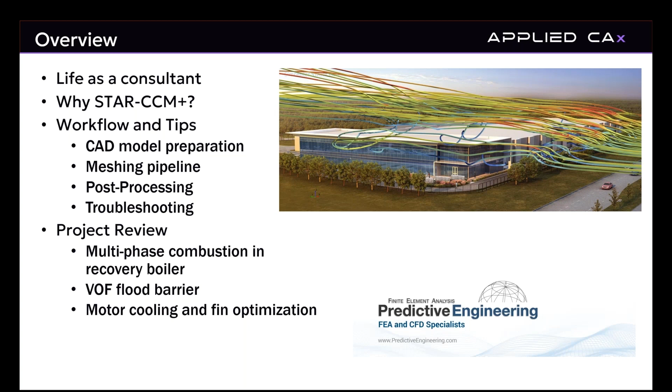We'll go into kind of what life is like as a consultant, why STAR-CCM+ is a great fit for us. And then the bulk of the presentation is going to be focused on my view of workflow and tips and tricks so hopefully you can take up some of these points and improve your overall processes. At the end of the presentation, we will go into a little bit of project review, some of the projects that we've worked on in the past, and how we've used STAR-CCM+ to help solve those issues.

So I want to start off with a comparison of what I call, quote unquote, a real engineer versus a consultant like myself. A real engineer, you are working for an organization. You have a defined mission, you have a goal, you have a product that you're working for, you have an industry that you're focused in. As a consultant, we are somewhat out there in the wild. We are working with clients that come from a wide range of industries. We have done aerospace, but we've also done medical. We've done building services. It may be wastewater treatment, or it may just be a structural, basic mechanical analysis.

One aspect of working for an organization, you probably end up doing the same type of analysis quite a bit, or same groups of analyses, and you will become an expert in doing that type of analysis. For us as consultants, we have to be a little bit more of a generalist. We have to be very good at a wide range of analyses and very competent, and that's because, going back to the first point, we have a wide range of clients coming at us from many different industries.

Another aspect is, working in an organization, you have set tools and set processes that you use, and namely here, it's a CAD tool. So your company's purchased, say, NX for CAD. Most of your models will be coming to you from NX. It's easy to link to those models.

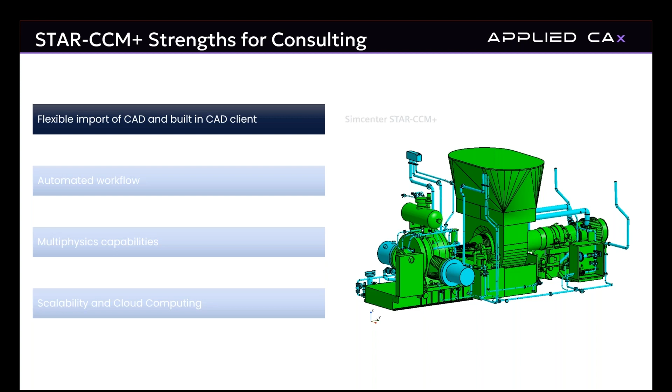We have an automated workflow in STAR-CCM+. So this again goes back to, typically, the overall project setup. We're getting into baseline design. We have to analyze that baseline design, see how it's working, and then quickly apply some changes to the design to find an appropriate solution for our client.

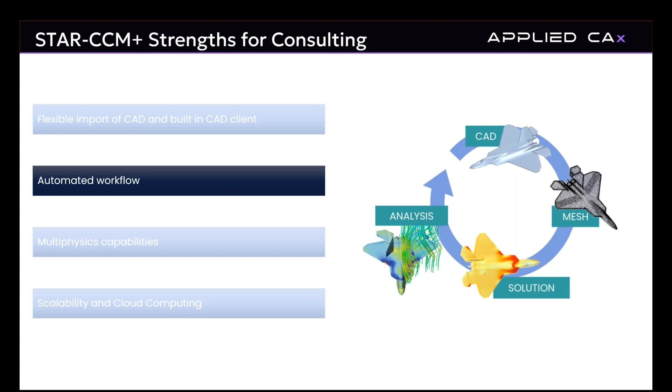We've got a multi-physics capability. Our projects, again, could be coming from all different industries. We could do something as simple as a standard flow that you could analyze with a constant density gas or constant density fluid, or we might be doing a multi-physics analysis where we're using Lagrangian particles for combustion.

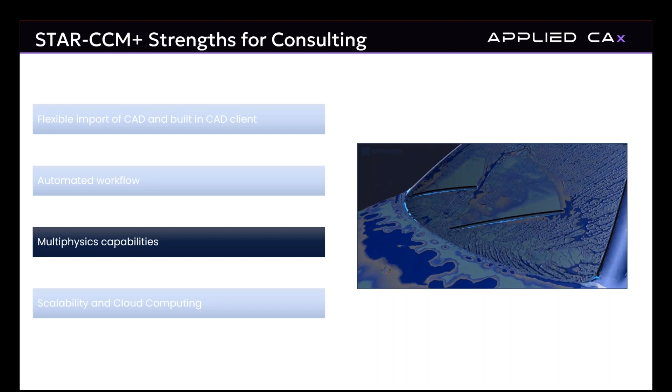And then again, scalability, cloud computing. With CFD, your models can easily get quite large, 10, 20, 30, 50 million cells. We do have in-house computers. Since we are focused on quicker turnaround, we do try to keep our models somewhat on the smaller end. We have resources to run solutions up to about 48 cores, but we've had projects where we've got to go beyond that. And that's where we'll take advantage of cloud computing resources, such as AWS.

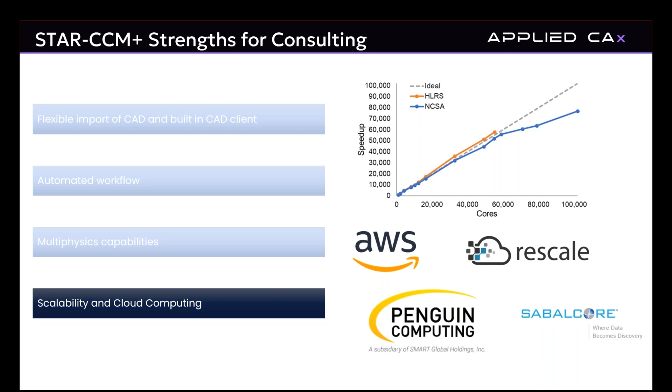So now I want to get into some of the workflow and processes that I personally use in STAR-CCM+. The overall layout of the workflow is, hopefully we receive CAD geometry from the client. Like I said, sometimes it's just a sketch. Sometimes, depending on the model, we might do what I call some external pre-processing of it, and that could be done in NX. If we get a model that's overly gigantic, which sometimes we do, I will bring that into NX and whittle it down, throw out everything and get to the section that I'm focused on, and I export that out as a Parasolid.

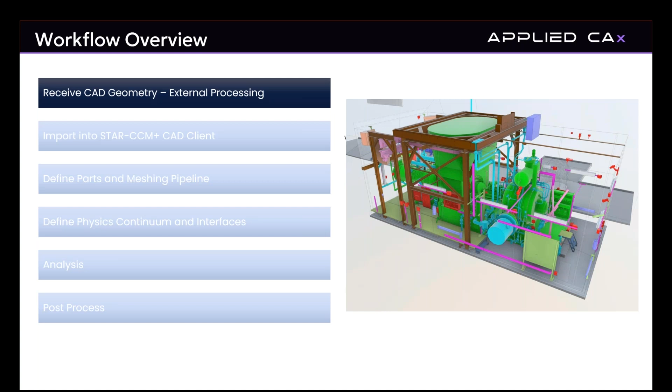But primarily, my work starts when I can get that model into STAR-CCM+, and I always go directly into the CAD client. And I'll show you some reasons for this. The CAD client, in my opinion, is one of the very strong features of STAR-CCM+. You've got a direct link to geometry, to mesh, and that's where you can easily make changes, influence the model, and influence your analysis.

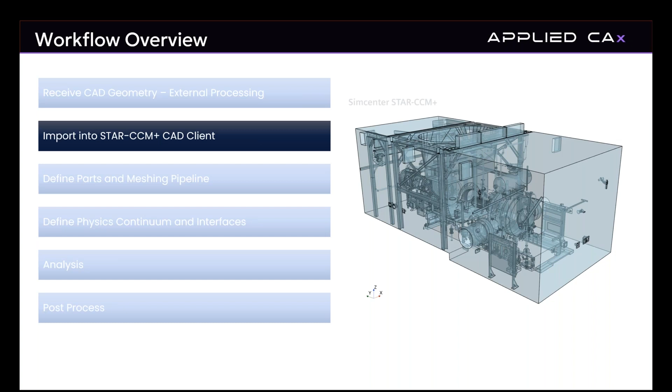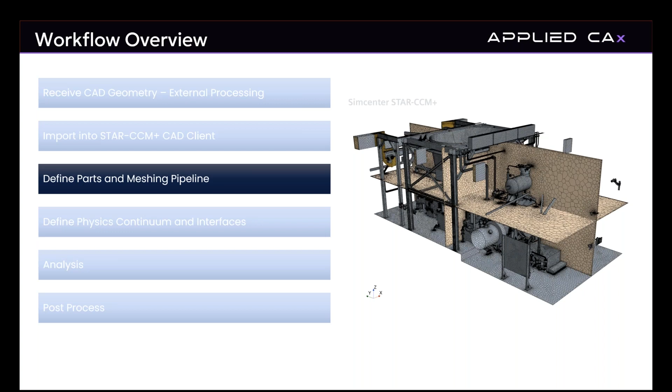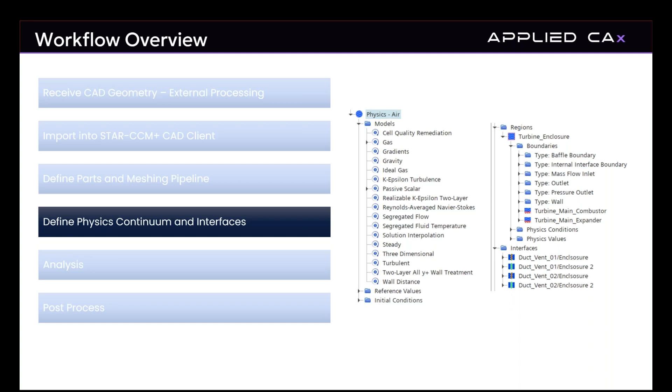After the CAD client, after you've done your fixing of the geometry and applied your changes, hopefully taking advantage of parameterization that I will talk about, you can bring that into the parts menu and define your mesh pipeline. We define our physics, continuum, interfaces. I won't talk too much about this here, as this is pretty dependent on the problem, the application, and what industry we're focusing on. Of course, you do your analysis.

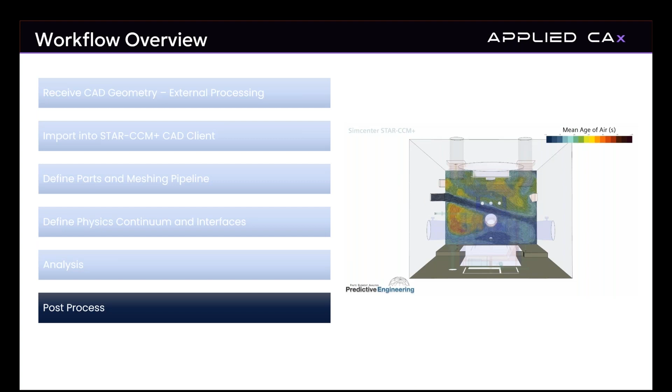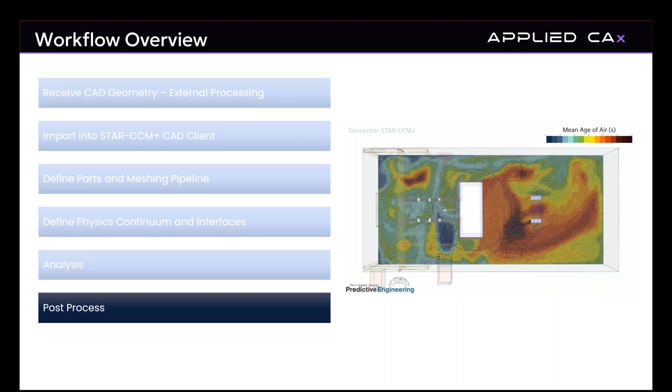And then, following up the discussion from earlier, we get into post-processing, and this becomes a very important part where we have to put our results in our report. As consultants, the primary deliverable we have is a written engineering report going to our client. In addition to making sure that it's a technically sound report, we have to clearly detail the results of the simulation to the client, keeping in mind that the client may not be a very technical person.

So on this slide, I want to go a little bit over the CAD client. How many STAR users are here? We got 1, 2, 3. How many fully use the CAD client as much as possible? Never. To me, it's a very strong feature.

So we've got an example. The CAD client in STAR-CCM+ is a full 3D feature-based parametric modeler. It is basically a lightweight version of, say, NX or SolidWorks or something like that. If you're dealing with a full assembly, it's definitely not good enough for that. But if you're dealing with a CFD model that you already want idealized, it is more than powerful enough. So we can use it for creating initial geometry, if we have drawings provided to us, or taking in geometry and adding some features or doing cleanup.

So an example I have here is a little T-pipe that could be used as a static mixer. In this quick example, we want to add some static vanes to it. So like any feature-based CAD program, we'll start off grabbing a plane. We can start with a sketch. And just like any program, we start adding our baseline entities. Here they could be squares, circles, arcs.

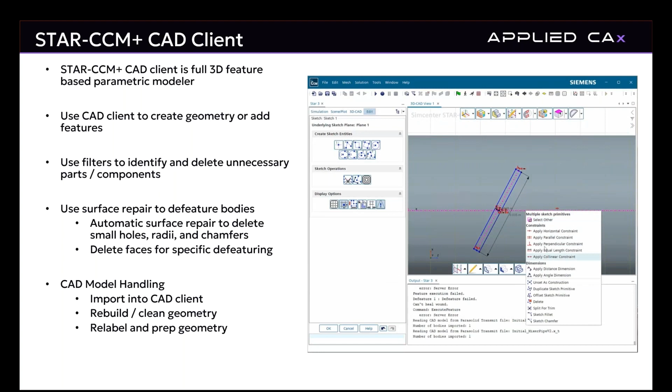On these entities, we can add geometric relations to define the sketch, and also add in our dimensions for this sketch. And here we're sketching out what would be a single mixer blade. So we've got the thickness.

Once we finish the sketch, we add an extrude operation to get a body part, and then we can add an additional operation to revolve this body part into a number of mixing vanes. Everything we did there, going to the dimensions we've added to the part - the thickness, the length of the blades, the angle of the blades, the number of revolutions of the blades - those are all numbers that can be brought out and used as parameters for study.

Once you do that, your parameters come out below here. They're live, so you can update them. You can change that parameter, hit update model, and it automatically updates the model. When that's connected to your mesh, you update your mesh and perform your next analysis.

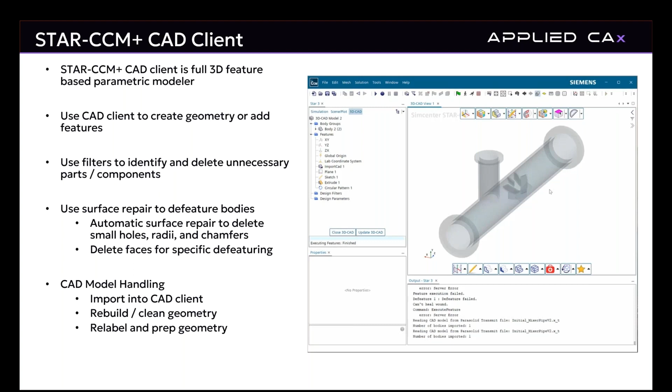First, we want to create a part filter. We'll go to the filter menu and select all the nuts, bolts, and washers that we want. It will identify all those components within the assembly, and then we can go to that filter feature and right click on it to delete all those parts.

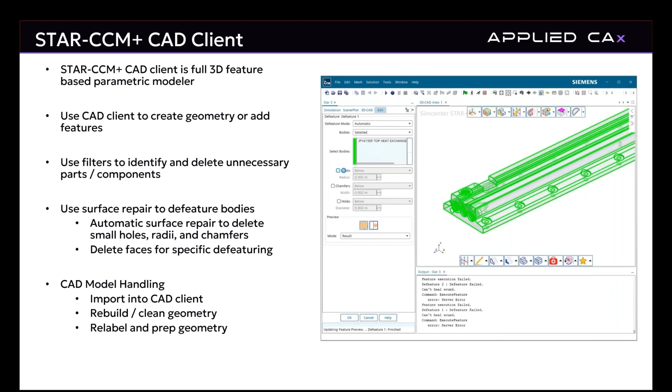In the next step, we may also use a defeature process within the CAD client to take out small features such as radii, holes, or chamfers. Doing this, we basically go to the part, right click on it, bring up the defeature tool - the automatic defeature tool - where we select the dimensions of the fillets and radii and whatnot that we want to delete.

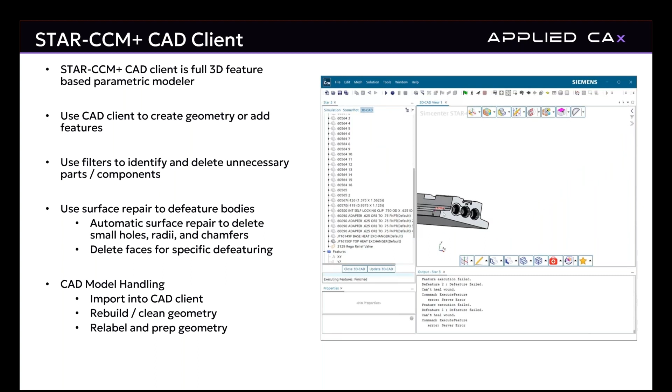It removes that automatically. In some cases, we might have specific faces that we want to get rid of. So we go to defeature faces and just automatically select all those faces that we want in order to simplify the geometry. And this is all CAD geometry.

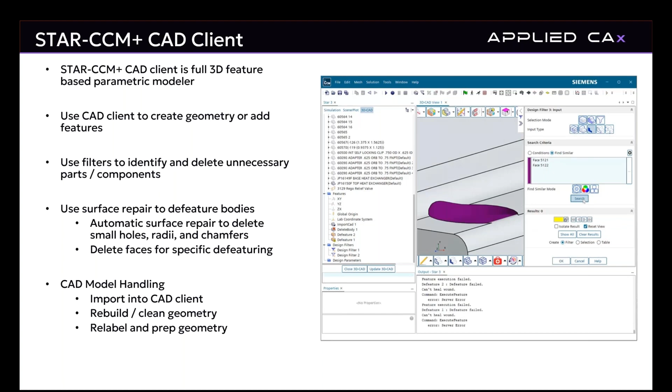This is also combining what we did beforehand with the filtering tool. So we can identify, say, all these faces that were the countersinks for those bolts, and it will create a filter of all those faces. Again, we can just defeature those faces. So there are lots of possibilities here and tools to use in order to clean up your geometry directly within STAR-CCM Plus CAD.

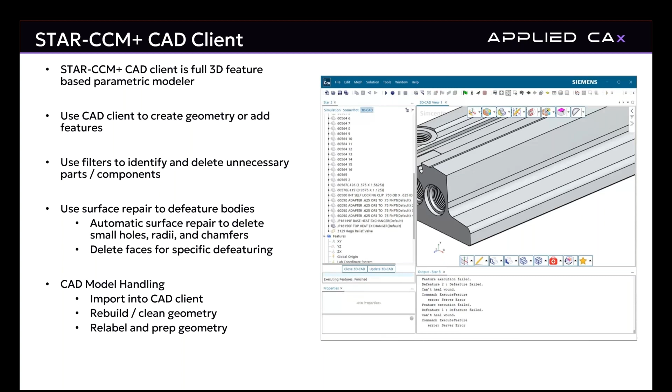I do usually end up with a geometry checklist that I want to go through, to make sure I have a clean geometry to go into a mesh. What I want to make sure is that I don't have any small little sliver volumes, because if you try to mesh this you'll get face validities of 0.5 or 0.6, and running those will just automatically blow up your simulation.

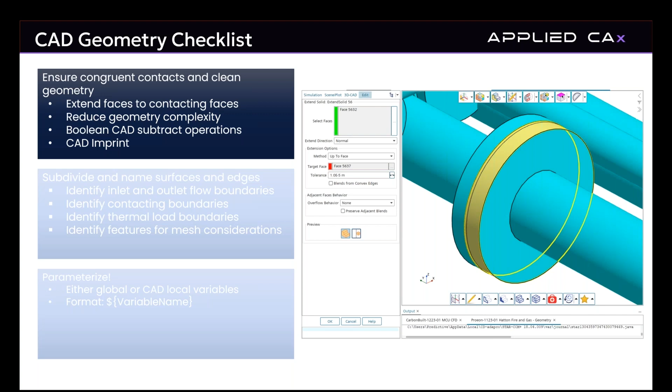I will extensively use the extend faces tool within STAR-CCM, within the CAD client, to make sure I've got clean contacting faces without any small gaps. Again, we reduce the geometry complexity and take use of the Boolean operations for CAD - subtract and add.

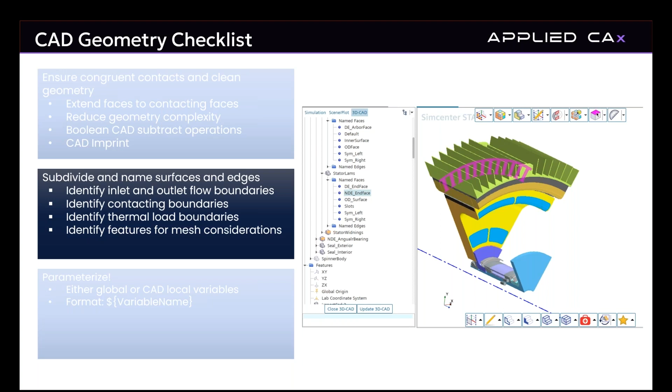Another item I want to diligently do with the parts is take advantage of naming the faces. You can basically go to any face on your part, right click on it, and rename that face, and that name will get populated down here instead of the default face name. You want to do this for your inflow conditions, outflow conditions, and any other surfaces that might be having contact or where a boundary condition is applied, and also any faces that you're going to want to apply a particular mesh to.

Lastly, in my geometry checklist, take advantage of parameterization. As I said, most of our studies are quick turnaround, so we have to make changes and take advantage of as much parameterization as possible. As I mentioned before, when you're drawing out your sketch or another feature, you can expose that parameter, and it becomes a parameter under the CAD menu, which you still have access to change in any type of design studies or design managers.

I typically prefer to keep everything as a global parameter. Under the main menu, the tree, there is a parameters menu. You can define those global parameters and still use those to drive dimensions or even features in the CAD client.

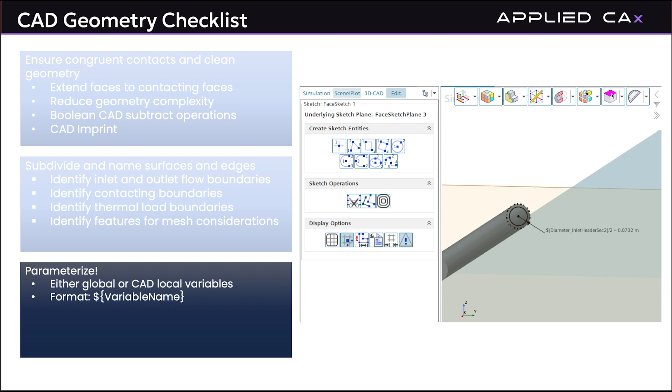The one thing you have to be a little aware of is that it doesn't automatically pop up into a menu as you type it, so you may have to force in the format of the dollar sign, squirrely brackets, and the parameter name.

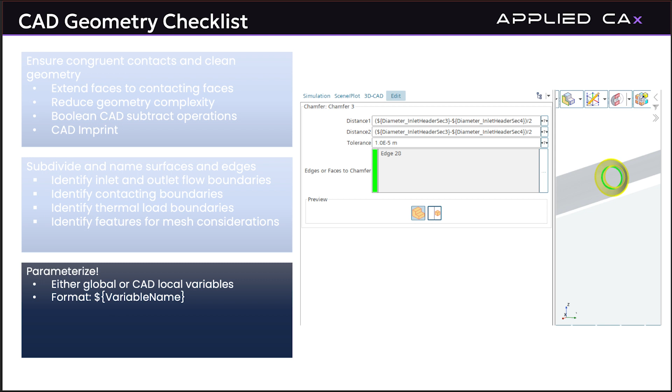One advantage of using parameters here is that they can go into driving a larger equation or feature. An example here is setting up a chamfer between two varying diameters.

After we've finished setting up our CAD geometry, we bring that over finally into the analysis side of STAR under the parts menu, and this is an important step where you basically build up your meshing pipeline. This is another key feature of making sure you have a parameterized and automated workflow.

Still with the clean geometry you have, you might be doing a volume extraction, you might be doing a transform operation. If you're looking at air drag over a vehicle, you can use a transform to basically change the angle your vehicle is at for drag at different angles of attack.

That transform operation can be driven by a parameter that you basically just update, and it regenerates the mesh. Quick question: how well does STAR-CCM CAD handle changes from incoming geometry?

You will have a feature on there that is your import part. So you would have to go back up to that import part, somewhat in a rollback state, and re-import the part, pointing to the new file you're looking at. It will try to go through and match the faces. Depending on the complexity and the changes you've made, sometimes it does that job pretty good.

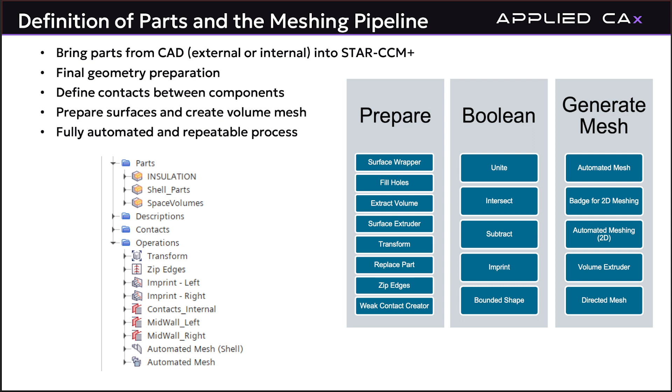One thing I'm going to point out in this, a very important operation, is the imprinting operation. Primarily we do this for identifying contacts. If you've got a conjugate heat transfer analysis, you've got your fluid volume contacting your solid volume, or...

...different solids contacting each other. It's very important that you have this imprint operation, or at least a contact operation here.

I have this little slide on here right now because I get throughout the year 2 or 3 support calls asking me a question, saying either they're having a meshing issue where they're getting a message saying they're overlapping surfaces or a piercing surface, or they're running their analysis and not seeing any heat transfer across a boundary like they would expect to see. And the answer is always kind of, well, did you put an imprint operation in there? No.

So what imprinting does, typically your CAD geometry is coming in with a set tessellation. You are finding those two contacts, those two mating surfaces, and retessellating it. I will typically do this when I'm first bringing in the parts: I will imprint everything together, and then I will assign those parts to the regions.

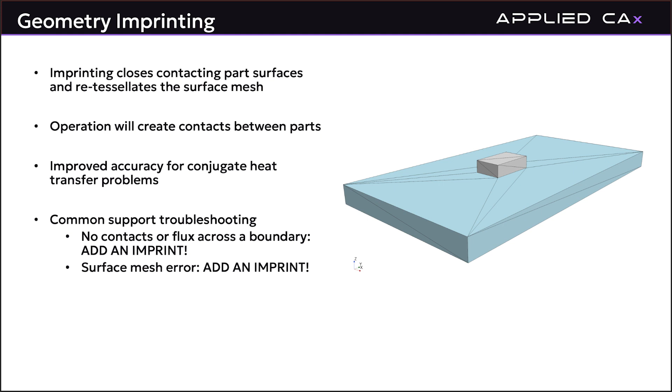When I do that, any parts that are contacting, it automatically creates those boundaries for me, and I don't have to worry about that. And ideally, if you take advantage of the polyhedral mesh, you can get a congruent mesh across the boundary, which is really your ideal, so you don't have to worry about any numerical errors from interpolation of results across that.

But this overall process also helps any meshing issues you've had. I have run into very sticky cases where I've had a meshing issue, added my imprint in the mesh pipeline operations, and still got a meshing issue of overlapping faces. If you go back into the CAD, there is a CAD imprint on the CAD side. I've employed that, and that's also been a feature that's been able to solve some of my headaches.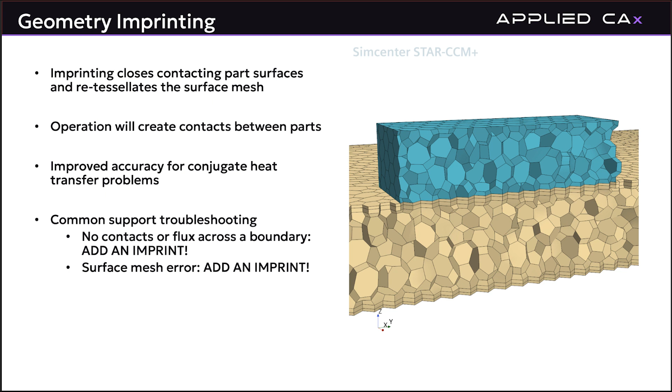Getting into the surface repair toolkit, this kind of gets onto an earlier question. If you're so bold, or you have such horrible geometry that's not CAD-based that you bring into STAR, if you have issues with that, there is a surface repair toolkit you can use. In that toolkit, you'll be going directly into the tessellations, and you can basically rebuild the tessellations if you need to. I stay away from this because I personally prefer to stay in CAD as much as possible.

I will use this as a diagnostics tool though. Especially if I've had an assembly with many different components and I try to mesh it and come up with an error of overlapping faces, I'll go into the surface repair toolkit. One thing with it is you can look at the different stages through that meshing pipeline, either the original geometry, an imprint operation, or the surface mesh, and see what the surface tessellations are and start identifying where your issue is.

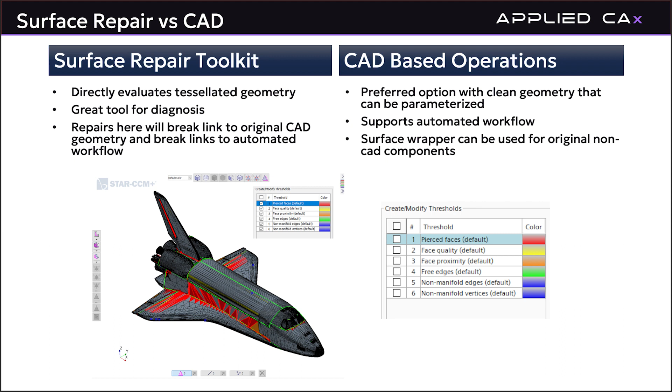Once I've found my issue, I will usually go back to the CAD model and try to fix it there. Why I do that is because once you've made changes with the surface repair toolkit, you've basically broken your automated flow - that nice automated meshing pipeline where you change the number, remesh, get a solution, that's completely broken. But there are situations if you're dealing with STL files or non-CAD files where this is going to be the only fix you have.

I want to move a little bit now into more workflow that I do for automation. One of the key practices I have is setting up my parameters here. The parameters will be all my flow conditions, boundary, pressures, heat loads, etc., in addition to any geometric boundaries I have. I might have a model with 3 or 4 inlet ducts that each have their own inlet mass flow rate defined, or maybe it's the same mass flow rate defined. I don't want to sit there and hunt through the regions and boundaries within the regions to find all those and make sure they're cleanly updated.

One thing I will point out in the newest release of STAR, well, not the newest, the 2310 release - I'm not sure if 2402 has come out yet - they've created an automation node. This is basically to help you reduce the amount of scrolling you have to do up and down on this menu tree. So all these folders for parameters, field functions, simulation operations, are now more tightly located here under a new automation node, and it should hopefully help your overall workflow.

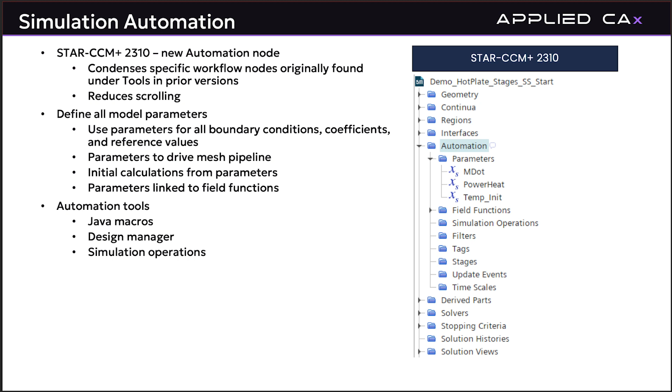Another feature that came out in 2310, which I'm excited to use although I haven't had a project to use it on, is stages. With stages, you can essentially set up 2 or 3 different physics models in your simulation and have the simulation automatically switch between these physics models. Maybe you were using a macro before, but this is just another way to help out with that automation.

The best application right now is doing transient analyses. So you could have two sets of physics set up, one for steady state analysis, one for transient analysis. If you're doing a transient simulation, the first thing you have to do is run a steady state model to at least know what your input conditions are - what's your input flow, what's your input temperature distribution. You may run that as one simulation file, save those results out, and then pick up those results to run in your transient case. Now this can all be set up under one simulation and automatically switch between those two physics and time domains.

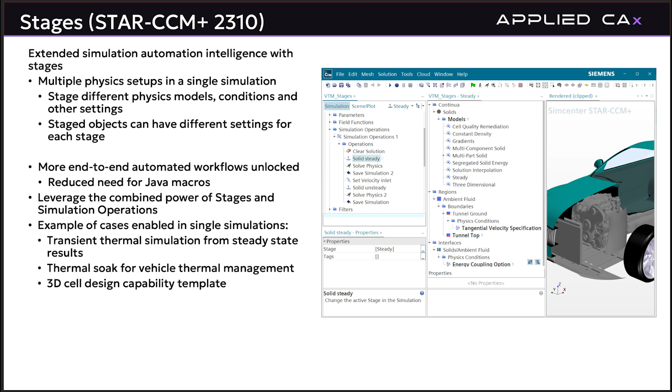Parallelization and GPU acceleration. This is a feature that's ongoing development from Siemens to enable more GPU acceleration with the different solvers in STAR-CCM Plus. It is somewhat of a long process because essentially they have to go through and reprogram each solver for running on GPU. As you're looking at new releases coming out, you'll see under the release notes what functions they've added for GPU acceleration.

You can see here in this plot, if we didn't have this bar here, there's a huge amount of decrease in time running GPU, up to about 1/5 of the time compared to a normal CPU. And you can also realize that as an energy savings too, if you want to track the greenness of the

simulation. The latest release of STAR that might be interesting to people here in the audience is that they've now added the coupled energy solver and then the native equilibrium air equation of state in 2310 to GPU solutions. So this basically enables running models for hypersonics in STAR-CCM+.

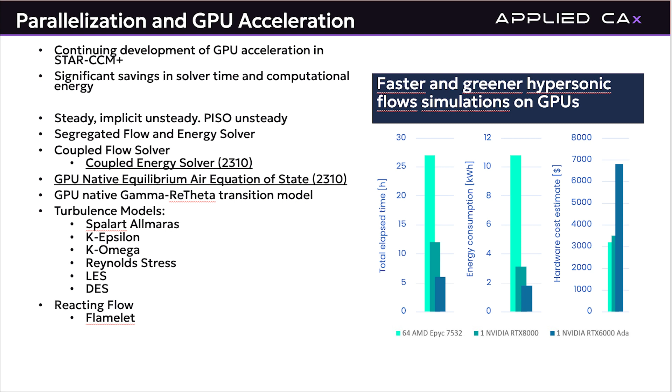Last couple of slides in this section, we'll move into post-processing. As I mentioned, we do engineering reports. That's our main deliverable to our customer. Yes, the engineering report documents everything that you did in the analysis, but you also have to document the results. Really, our customers only care about the results.

So the results in CFD, they're going to be plots and images. You got to make sure that they are readable and that a person who may not be a technical person can understand this. First thing I suggest starting out is going into the tools, options, visualizations, and you can set up a couple different default functions here so that you don't ever have to worry about it. One's the color bar that I'll talk about later.

The next is on the plot. For some reason, the plot text on default STAR is just way too small. You can't read it. If an engineer put that in a report, I would slap them because there's no way that you can read that. I suggest you go in here, go to default plot options, increase your font size. You can increase the line thickness. So if you do carry over 2D XY plots, histograms, they're clear, readable for your reports.

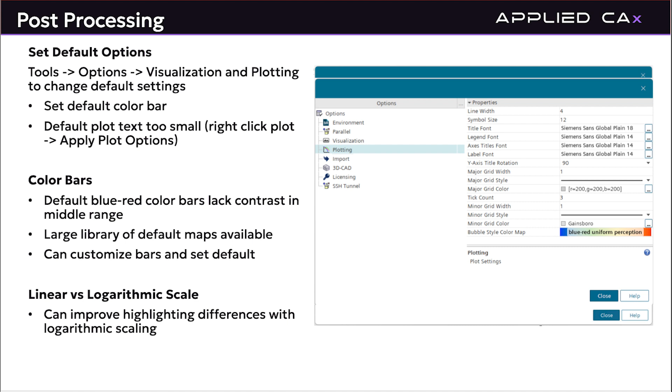Next, I would say is looking at your color maps. Again, I kind of think the default color map that they give you in STAR, it's good for seeing the high and low ends, but you miss out some of what's going on in the middle temperature range as we see here.

I have really moved to using these white-red color maps that have a lot more contrast so that I can pick up a little bit better of the differences, say, what's happening, not so much the extremely hot part, but the not so hot, cooling off part. We can see these a little bit better than just kind of a bland orange, washed out green.

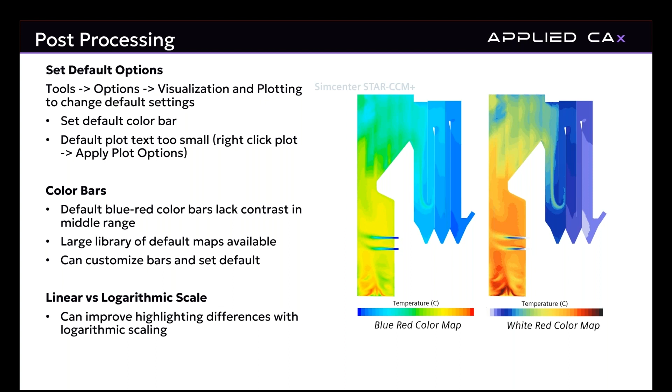And then you should also play around with whether you're going to have your plot set up as a linear scale or a logarithmic scale. For us, we do a lot of simulations that I would say are building flow or enclosure flow. So you've got air vents that may be delivering air at higher velocities into a larger enclosure or room, around 10, 12 meters per second, but the airflow in the rest of the room is going to be fairly

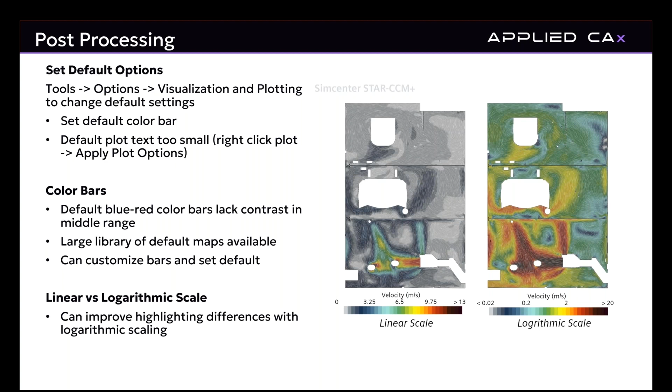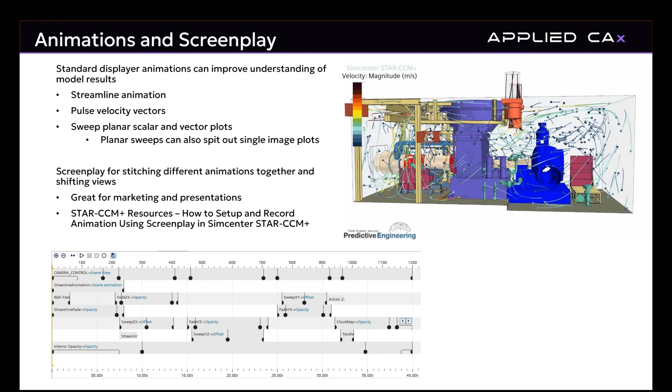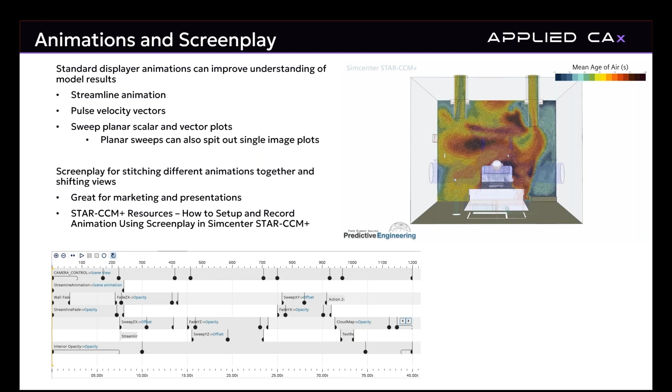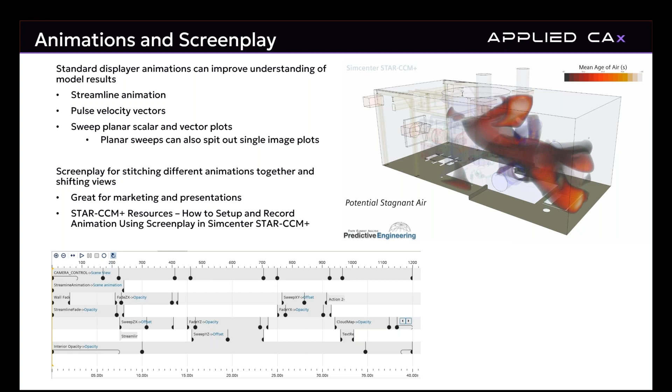And lastly is animations and screenplays. We do have on our website for Applied a little video on how to set these up. These can be pretty fun to set up if you've got a number of different plots and streamlines and views within a scene. You can animate through all these different scenes and put together a much larger video. Really, the greatest impact of this is more or less for marketing. If you're going to be meeting with chief engineers and the chief engineer is your boss and you want to show off your simulation, this is a great tool to use for that.

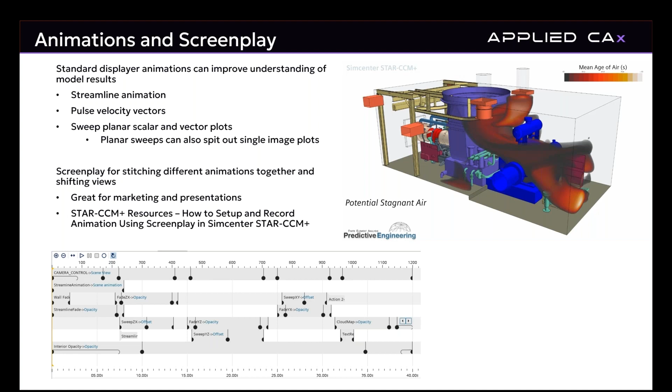Yeah, I got a few slides here that get into some of the projects that we've done in the past. One's on boiler combustion. This has been a good partnership with a local company in the Portland area, SHB Power Plant. They focus on retrofitting power boilers and recovery boilers, primarily in the paper industry. We do the CFD modeling for them to analyze baseline cases and then evaluate changes that they make.

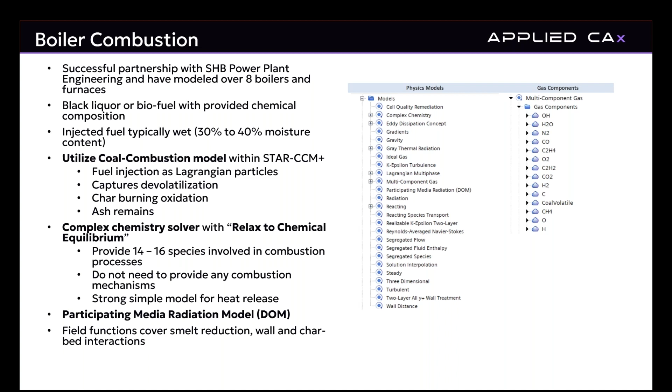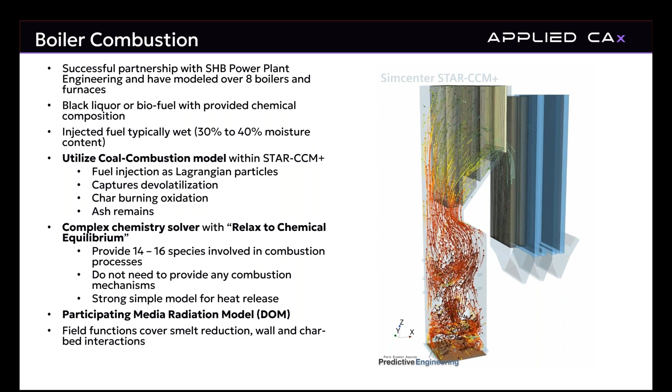These are very nasty, complex models. We are actually taking advantage of the coal combustion model in STAR-CCM+. The simulations basically start off where they're injecting a black liquor fuel towards the bottom of the furnace. We capture the drying, devolatilization, char burning reaction, ash remains throughout that entire combustion process to understand what the resulting flow is, heat distribution, and try to get some idea of what the emissions could be.

One of the challenges for this is that we can get a chemical composition of the fuel that they're using, but we don't have any idea of what the actual combustion reactions are that are occurring. That data just doesn't exist, and mills don't have the money to go through and do detailed tests on those. So we take advantage of a complex chemistry solver, relax to chemical equilibrium. We can name a number of species that we know are going to be general species within the combustion process, and without knowing anything about what's actually happened, we are able to get a good idea of where the flame position is going to be and the overall heat release.

Again, we try to keep these low cell, and it depends on the size of the boiler. Down below, they call this the bull nose, we try to keep this below 10 million cells, but it gets up higher as we go up through different platens, and it depends on the design of the boiler that you're looking at. So they can get up to maybe another 20 million cells. I mostly run these on an in-house computer with 48 cores, and I'll run for a week. I have taken these up to AWS, 96 cores, and that's a significant improvement, getting down to a couple days.

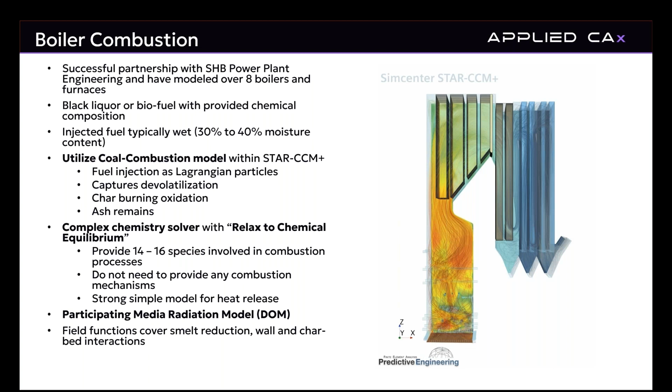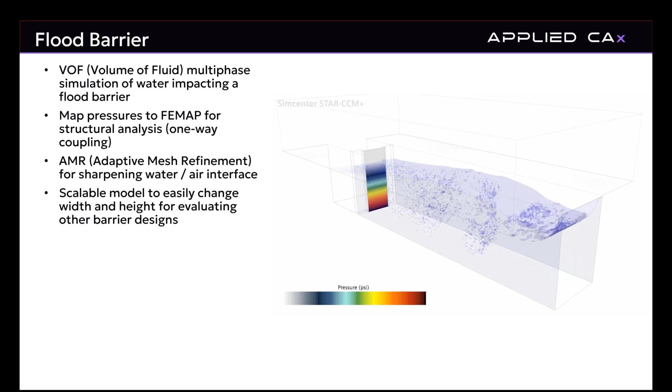Another fun project we did was a flood barrier. This actually started off as a simple hydrostatic analysis. A small company that was interested in putting out low-cost aluminum extruded barriers wanted to understand the maximum width and height that they could design their barriers for. We did a number of studies for them, hydrostatic pressure, gave them their answers. They came back and said, well, we have this requirement that it has to withstand flow at a certain velocity. So we thought this would be a fun project to put a cool video together using the VOF model, and actually have it smack into the barrier, then take those pressures, map that back to the finite element mesh that we have, and reevaluate their design.

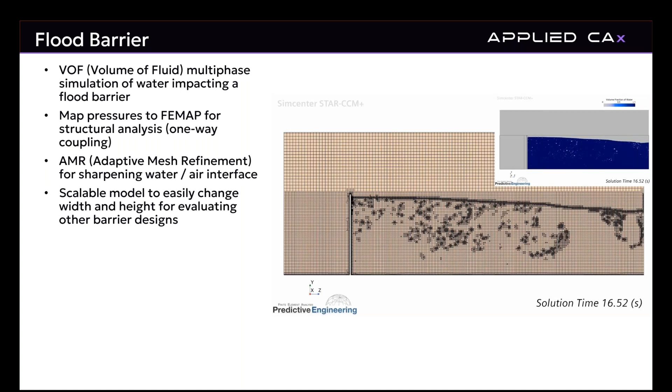In this analysis, we're taking advantage, with the VOF model, of adaptive mesh refinement. So adaptively, it is going through and refining the mesh where the interface is between the air and the water. This is probably a very applicable tool for many people in this room. Again, I have another quick video on the Applied website that shows how to set this up. Great applications for this technique are supersonic or hypersonic applications where you don't want to completely over mesh the entire simulation. You can just let it find where that shock is and locally refine the mesh there.

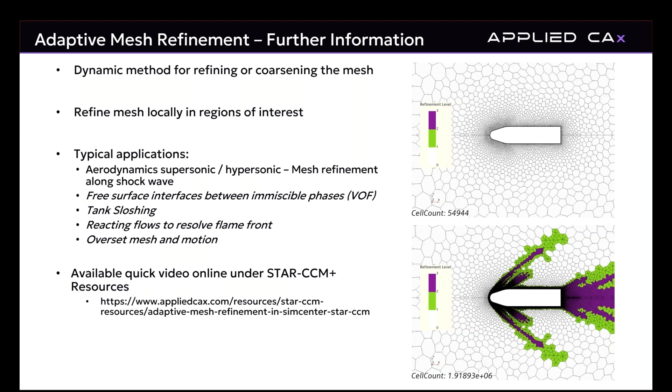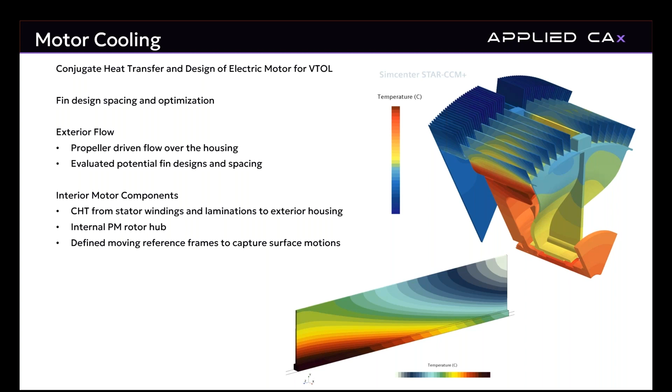So that's basically a summary of the overall simulation workflow that we use. Again, we're taking everything that the client provides to us. Hopefully the client is providing us information in a neutral CAD format that we can put into the CAD side of STAR, start building the simulation with a clean geometry, and take advantage of the automation features within STAR-CCM+ for design studies.